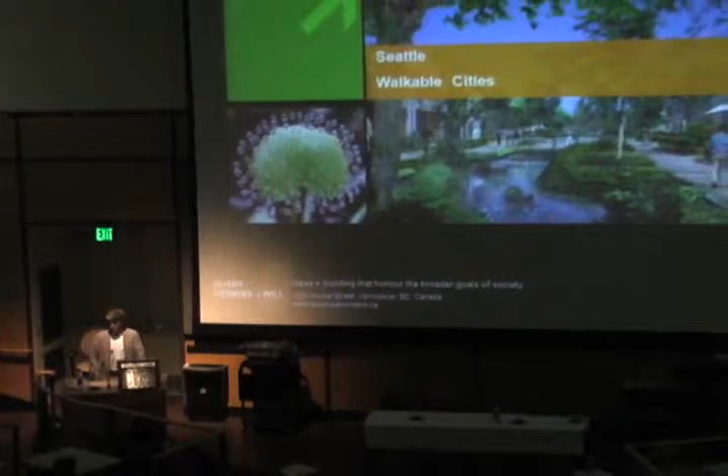I'm going to start a little bit of doom and gloom. There's a big problem out there called global warming, and a big part of it is automobiles. And so if we can reduce automobile use, then you've obviously got a lot more room for your vehicle, or for your bicycle lanes—not just bicycle paths—and also for pedestrians.

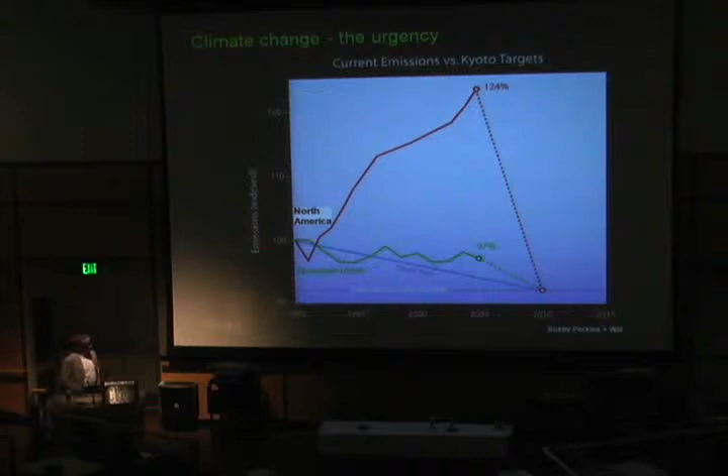So, where's that? This is the Kyoto Accord, signed in 1990. The United States didn't sign it, but most of the major countries in the world did. You can see that most of the European countries are trying to get to the goal by 2010, but Canada and the United States are going off the Richter scale, spending energy on all kinds of things.

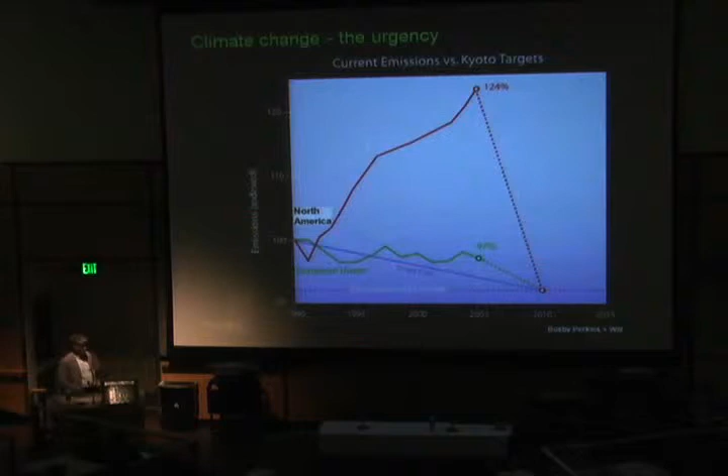And a big part of it is the way our cities are designed. They're all designed around cars and vehicles, and we need to change that thought.

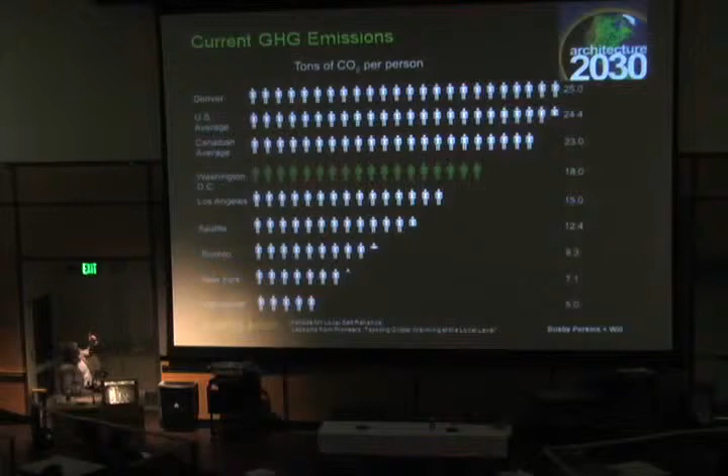So here's basically a range of various cities in North America, and what their carbon footprint is per person. You can see the U.S. average, and the second line up there is way up at 24.4 tons of CO2 per person. Canada isn't much different. Here, Seattle's much better at 12.4, and Vancouver—I don't know why we're so low—but we're down at 5.

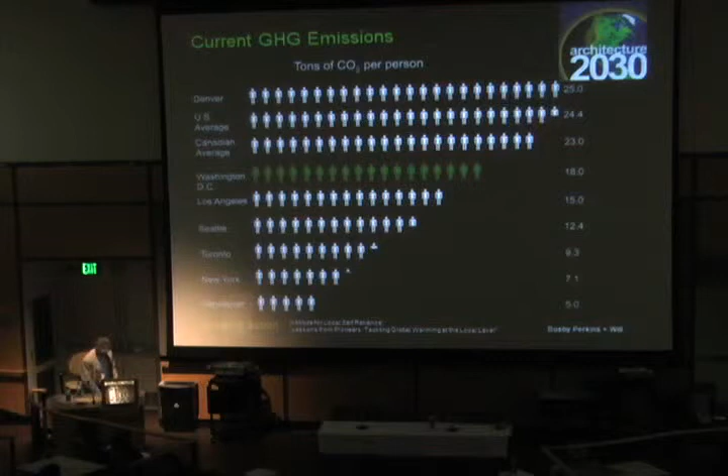But the goal really is what Oslo has, at a really nice 2.5. And that is what the experts feel is what every city should be aiming for, to make sure that we don't have a huge calamity on our hands, so that my 11-year-old daughter doesn't have to worry when she gets older. Well, you can see there are some major big cities there that have a fairly low CO2 footprint.

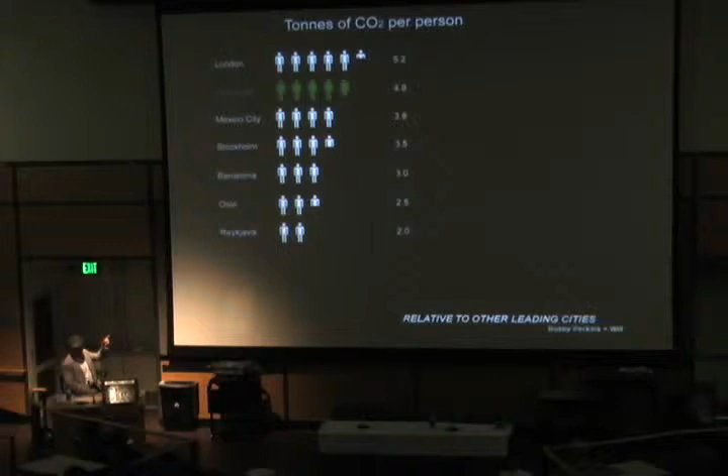You know, Mexico City is one of the biggest cities in the world. Obviously, it's a poor country, poor city. They have a lot more transit—there's a huge transit system there—and a lot fewer cars. So there's some reasoning behind these things.

But what I'm going to do now is present a quick scheme that we did to try to get Vancouver down to 2.5, in the next 20 years. And then I'm going to show this project in Dockside, which you will see follows on from the Vancouver study.

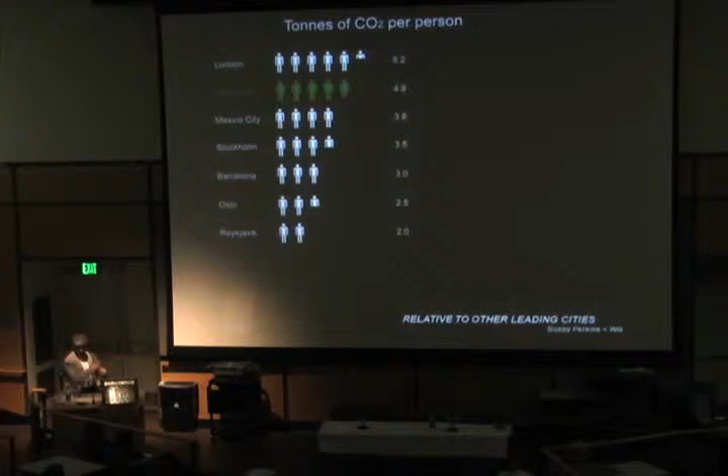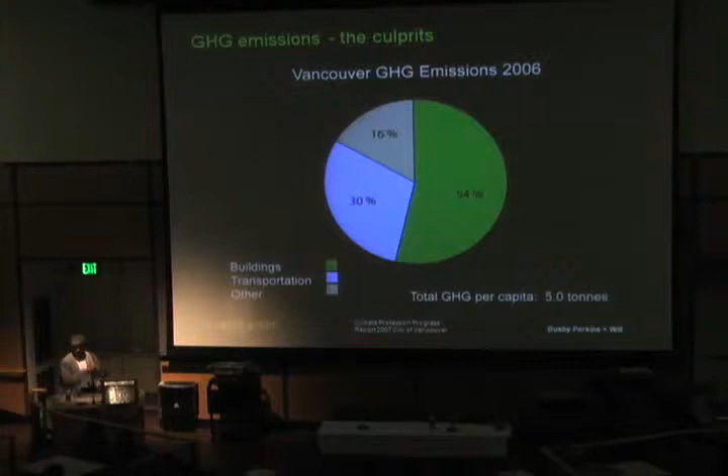The hybrid car isn't the solution. The solution is rapid transit, changing the city design so that you don't need to get in your car. And that means either walking and having communities where you can walk to work, walk to your library, walk to your fitness club, whatever, or take your bike. We need to change our zoning and urban design so that we don't need to get into cars. Make it so that cities aren't designed around cars.

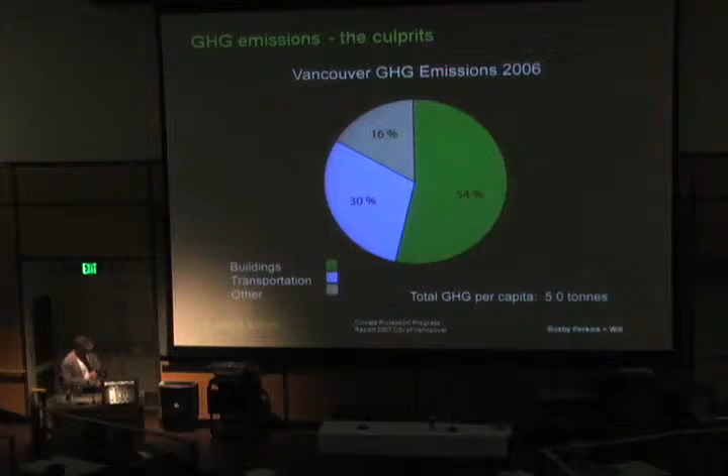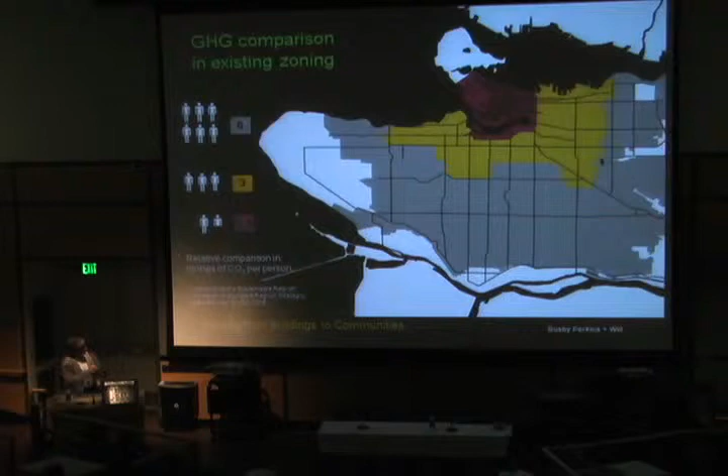The yellow is mid-rise density. So those people, like me—I'm in that yellow somewhere—I walk to work across the bridge downtown, but a lot of people are taking transit or could be biking. That's a half-hour walk, max.

All the people out in the gray area there, that's single-family housing. They're all getting in their cars and going somewhere because there's hardly any business in those areas. So they're either going further out the valley, or into the middle of the city, or across one way or the other. So all those people are using primarily their vehicles.

There's not a great transit system. There's a transit system right now that goes out towards the next community, Burnaby, over here. And there is a new rapid transit system coming out to the airport that'll be done next year.

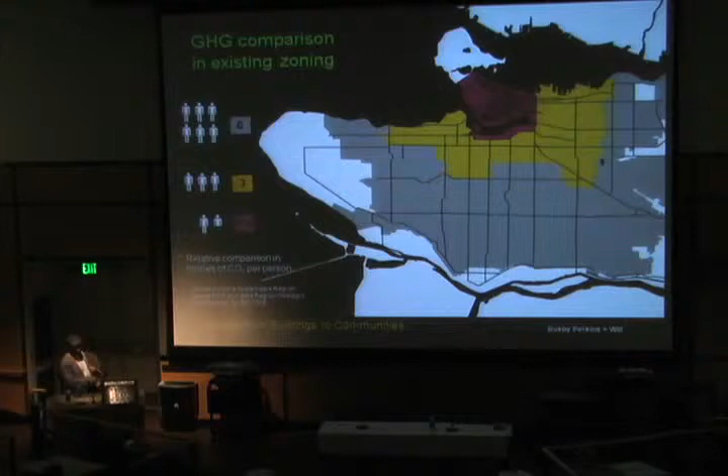There are a few high-speed bus lines, but the rest is just very minimal bus service. So anyone out here can't just hop on a bus and go over there. It's really difficult. So this needs to change.

So this really tells you the GHG footprint for each area. So how can we do it?

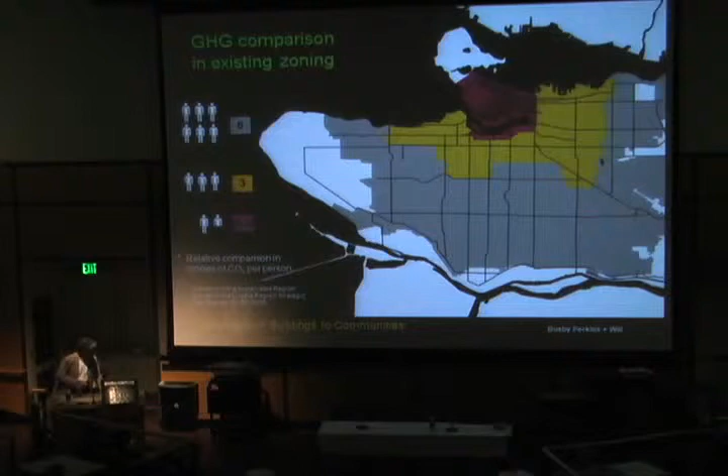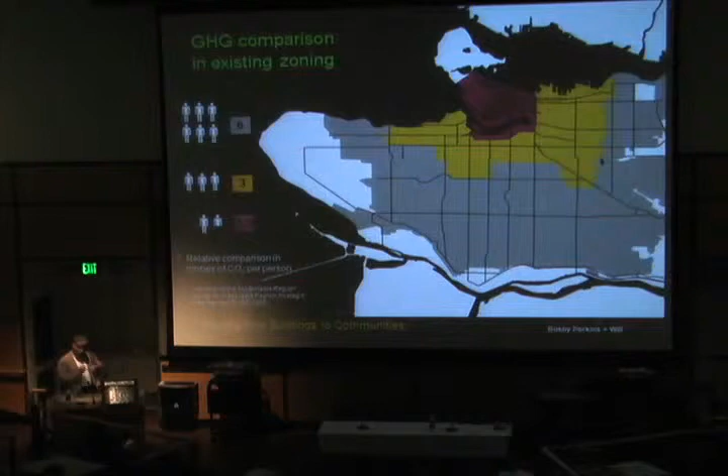There could be the cyclists, what I call the urban guerrilla cyclists. They can go about 5 or 6 miles, put on their funny shoes and do all this kind of stuff. But that's only 1 or 2%. We need to deal with this so that we get the other 60% or so out onto their bikes comfortably. This should be something that people feel really easy to do, not something that's a chore. The urban guerrilla bikers are committed. There's no way we're going to change them. They love it and they fight for it.

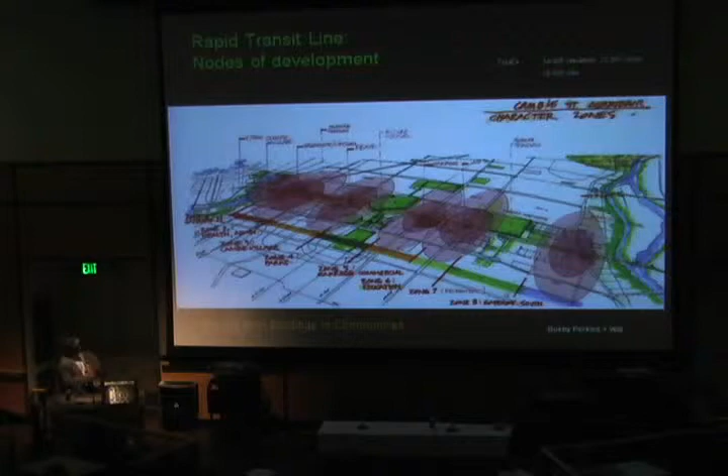So this is a diagram down one of the transit corridors. The idea would be that there'd be a grid of either rapid transit or high-speed buses that would have infrequent stops, and so you would create village nodes all the way along, rather than having this gray area. These would have higher densities.

They would have all of the amenities that any town should have. So instead of the center part of the city in the next 20 years just slowly moving out, the idea is creating a whole bunch of villages to augment that.

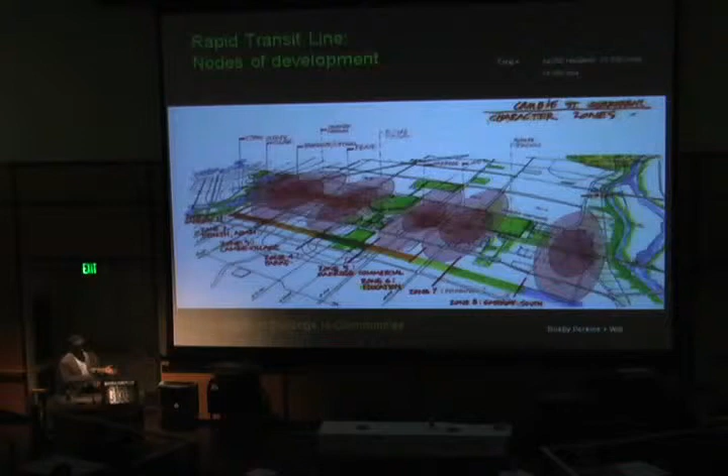In the next 20 years, by 2030, Vancouver's population is going to increase by 50%. That's a huge amount of people we have to deal with. We can't just deal with it by slowly moving the center out. We need to deal with it on a bigger level.

So by creating these villages, people can then work within the villages. You can get old, seniors will be there, there'll be fitness areas, shops, everything will be there so you can do what you need in that area. If you need to go somewhere else, then you get on rapid transit.

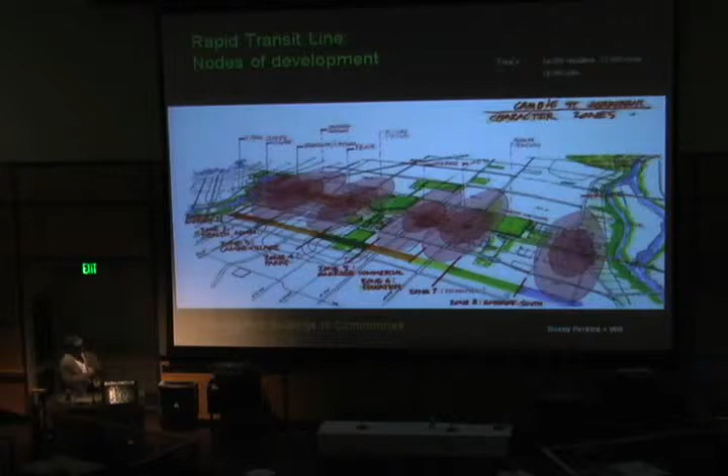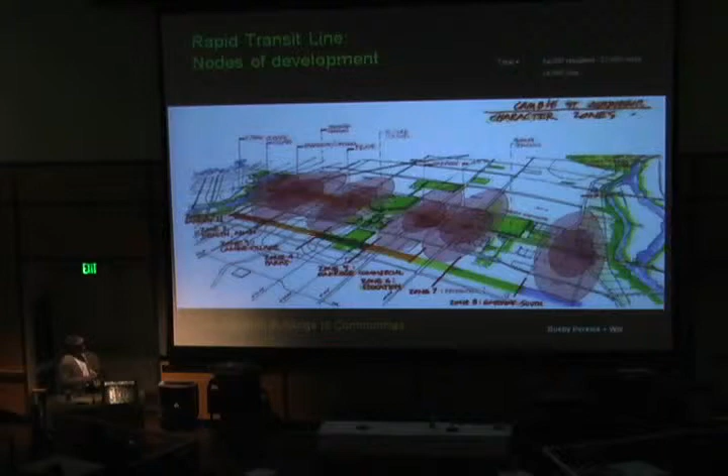Vancouver is hilly, just like Seattle, so biking long distances is good for some people, but it's just not going to work for everyone. So you need to be able to give them the ability to walk and bike locally, and then get somewhere else on a faster, easier mode of transport.

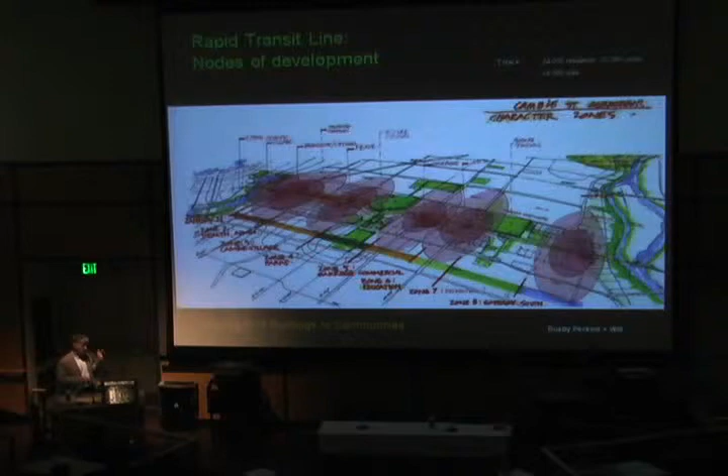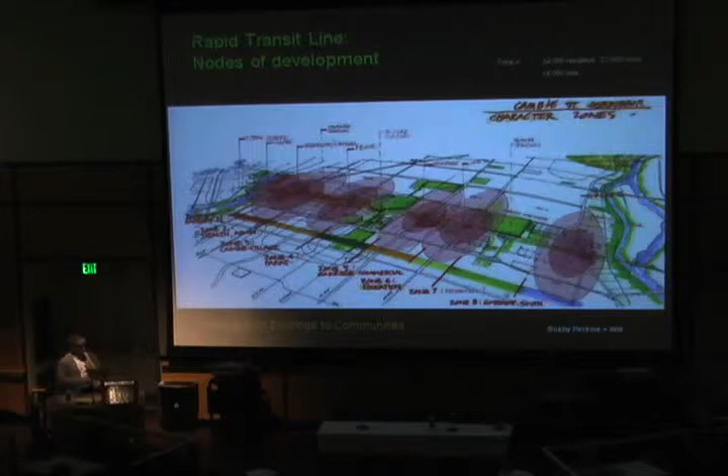There's a huge amount of money spent on infrastructure to keep our cars going. It's silly. If we took that infrastructure and put it into rapid transit, took out 2 lanes of every street and made it into rapid transit for buses, the amount of saved energy would be enormous.

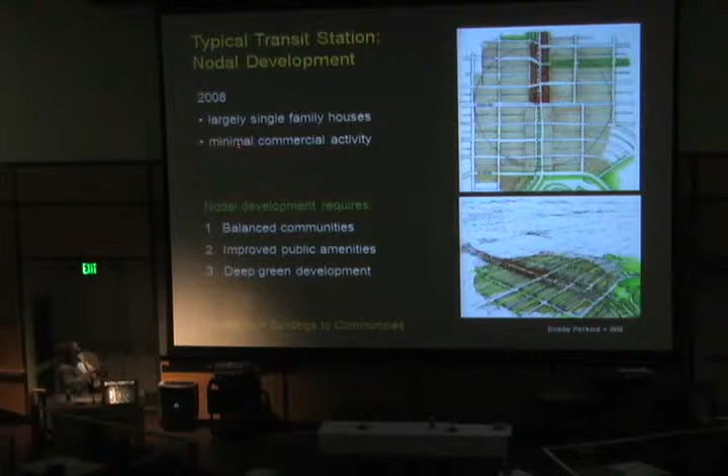So this is how one of those nodes exists currently. There's a bunch of 2-story commercial, probably with little residential on top, and then the rest is all single-family housing around it. So the idea is that it's largely single-family, with minimal commercial activity.

So the idea is to start going in this direction, where you would have buildings that could be 6, 8, 10 stories tall, that would gently flare down to get back to the single-family residential area, but it would become more of a village. Think of Hampstead Village in London, Greenwich Village in New York, those kind of spaces that are really great at the street level, yet still have really unique places to be once you're into the building.

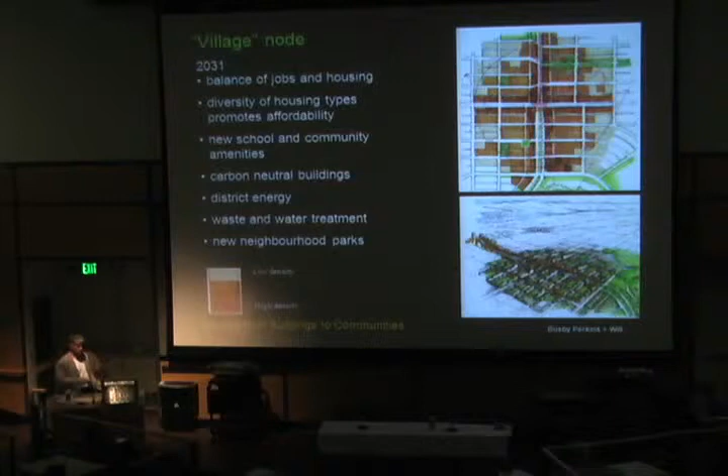And they have their shops, you don't have to go anywhere. They're very quiet spaces. And the one thing I like is the aging in place. You don't have to go off to some nursing home in a cheaper neighborhood. You stay where you are, where you're friendly, where your friends are, where you know things, where you're comfortable.

Now, Vancouver started at a fairly decent situation. There's some big cities all across North America. Calgary in Canada is one of the worst. It's just a small bunch of office towers in the middle and then piles of houses.

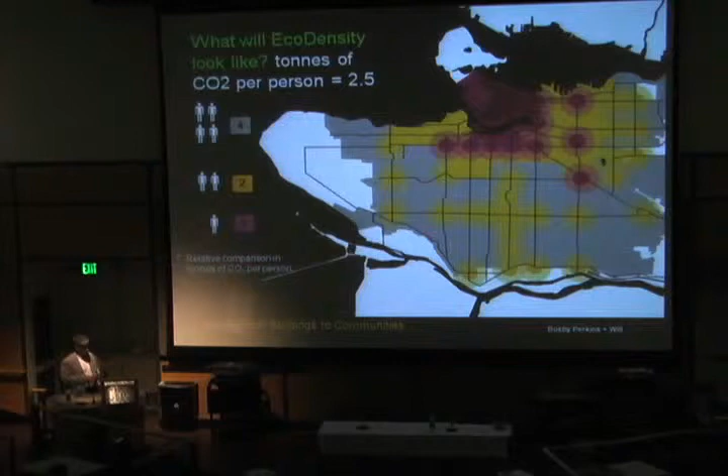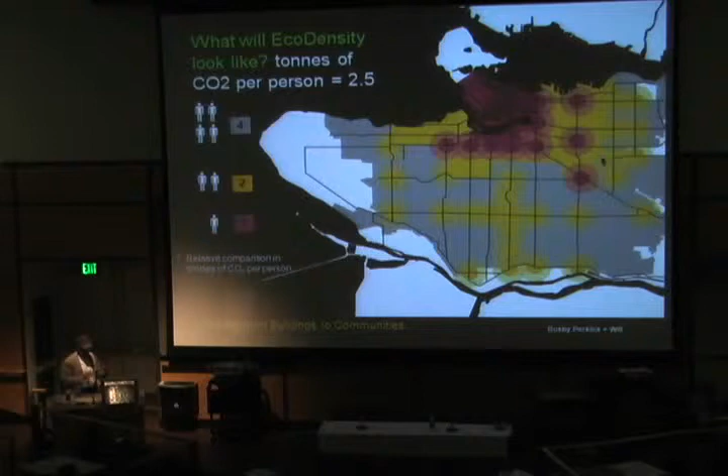They've got a huge issue because the land just seems to go on forever, there's no trees there. It's easy just to build another street. They've got to change the way they're doing things if we're going to have any reasonable way of dealing with global warming. It's a big issue. So let's get on to how we can work that out and make it work fine.

So this is a project in Victoria. I think you've hopefully been there, it's a very cute town. It's not all that big, I don't know what the population is, maybe 150,000 to 200,000 people, but it's the capital city of the province of BC, so there's a lot of important buildings in there, and a fair amount of money spent on infrastructure.

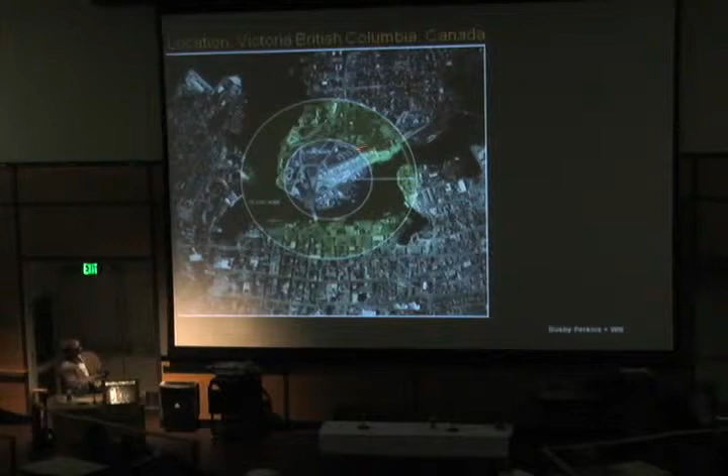This is the downtown, the site is this piece here. You can see we put a couple of rings around, there's a 5-minute walk and a 10-minute walk. So you can come across a bridge and get into the downtown area. This is the major downtown area, there's a big hotel here, the Parliament Building, and lots of shops in this area. So it's in a really neat location that way.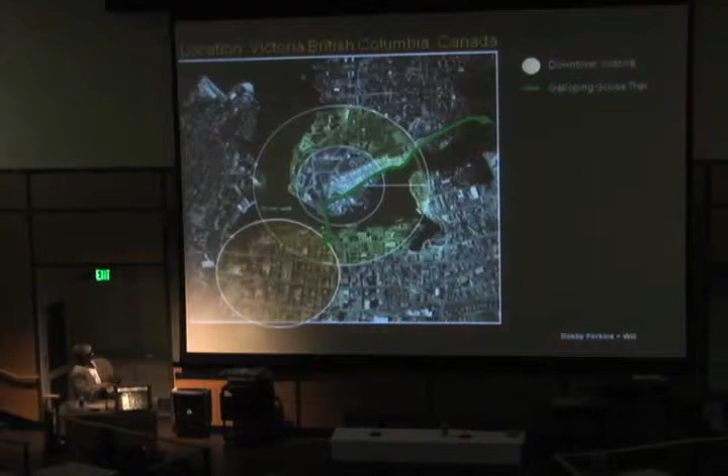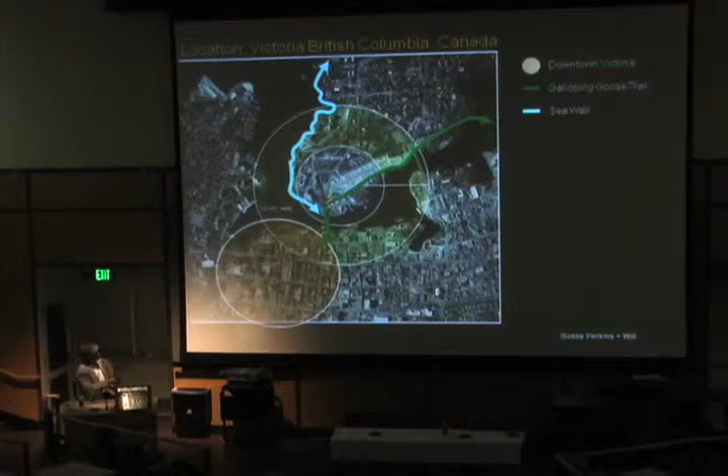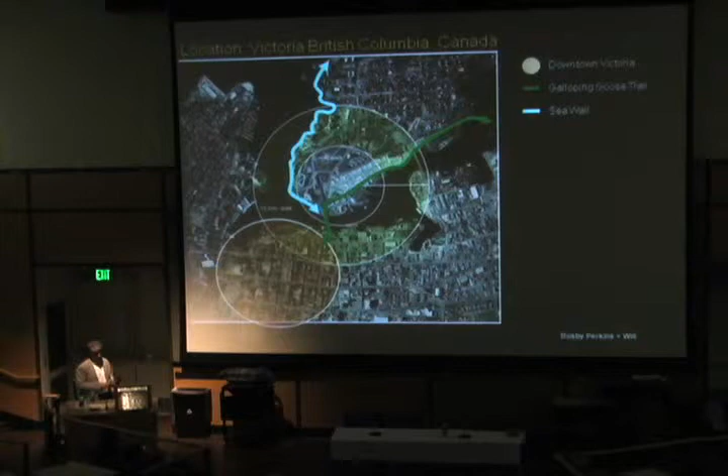Earlier someone mentioned the Galloping Goose Trail. I think it's named after a train route that used to go up Vancouver Island, and this follows the old train route. The train's not there anymore, but the flat trail is, so it connects right into the downtown through the site. There's also a series of seawalls that connect into that, so you could continue walking or cycling along there, and the same happens on this shoreline as well. So it's well served cyclist-wise on the site, and throughout Victoria it's quite well used by cyclists and walking paths.

This is a map showing where the Galloping Goose goes. Our site is this little area, right where that green part is. I think the green means, I can't quite read that, but the red is on paths, the green is on sides of roads, and the blue is on a boulevard or something like that. So it's a huge network, you can go a long, long way on this trail.

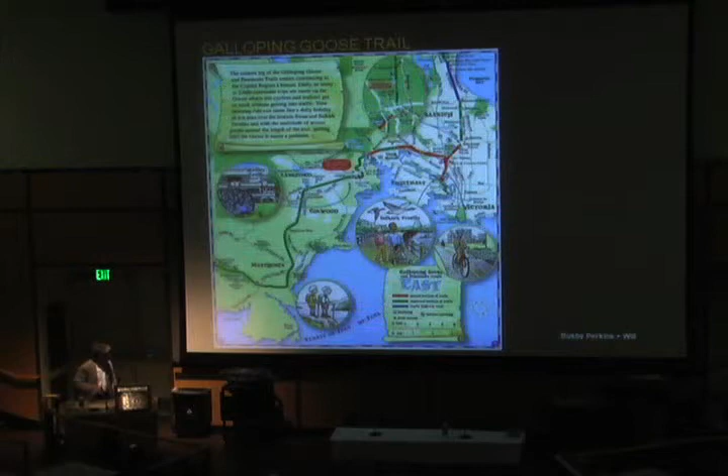This is the site, it goes up to about that area there. The City of Victoria owned it, and the city also owns all these dockyards here. They want the dockyards, which aren't part of the site, kept as a working dockyard for small to medium-sized craft they fix there. Eventually there will be a pier, a sort of retail pier that would come down here, so there'll be a connection to the water. The water line used to cut in about here, this is all fill, dirt, contaminated fill. There's quite a drop from up here down to this road, about a 50-foot drop, so there's a really nice slope across the site. Overall it's about 11 acres.

The city owned the whole property, so they were able to put some fairly strong guidelines on the development. There was a competition for development teams to get the site, and we were the architectural part of that team. There was a whole series of mechanical, electrical, geotechnical consultants, plus a developer and a financial team to come up with the bid. We were selected, I think in 2004, and it's gone ahead quite quickly.

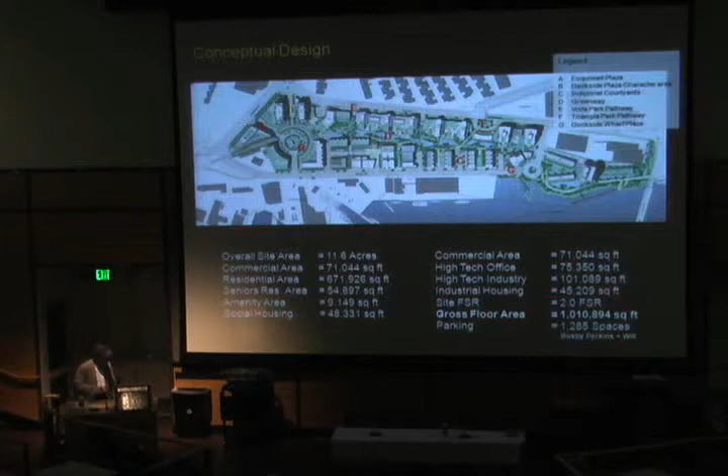So here's the site. There's primarily residential towers of about 8 to 14 stories, intermixed with some townhouses along the upper road here, called Tyee Road. This lower portion is 3 to 4 stories and would be mixed use, light industry or commercial at grade with housing above it. So it's an interesting sort of mix of uses there.

And then this is more of a commercial node with a hotel, office, and commercial space around a big courtyard. Some residential here, and a seniors building there. The seniors building is purposely placed so they'd be looking over where the active areas are, giving them some interest, and it's not very far for them to go to the commercial area. There's also a little odd bit of property up at this end of the site where a taller building would be. The idea is that there's a bridge here and another bridge at this end of the site.

So there's tall buildings at the two ends of the site to sort of anchor the project like bookends. They're in the range of about 14 stories. Victoria doesn't have very many tall buildings.

So phase 1 has been completed now, and it's been awarded this LEED Platinum score. LEED stands for Leadership in Energy and Environmental Design, something like that. It's a checklist, a way of measuring and comparing buildings in sustainable terms. There's LEED certified, silver, gold, and platinum. Platinum is the highest, so it's done really well.

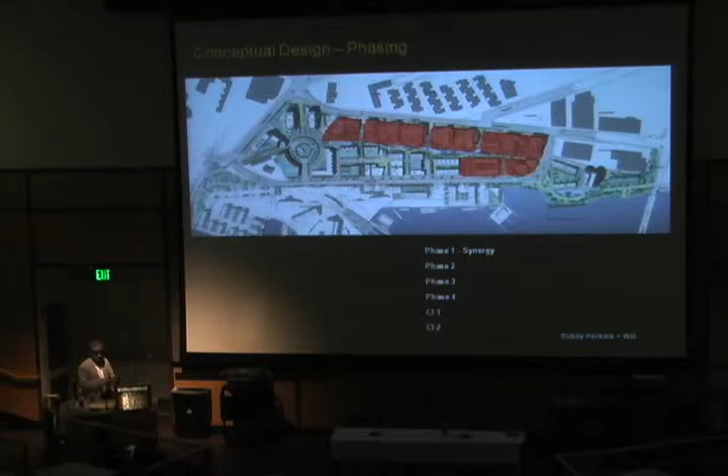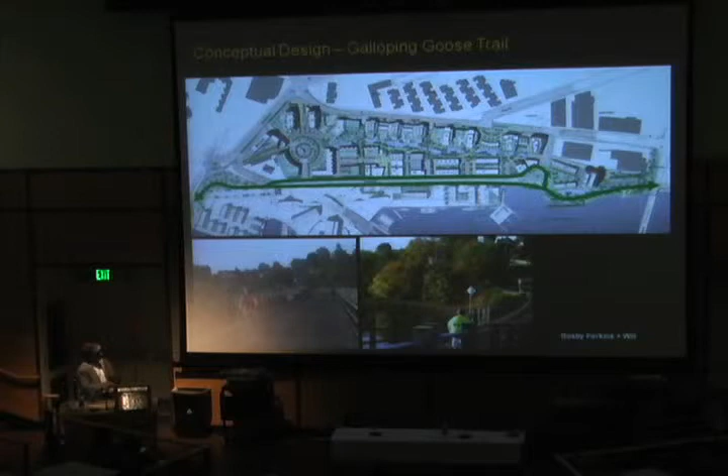So the Galloping Goose Trail—this is Harbor Road. There's an existing bicycle path that connects into a bicycle trail, so we had to work quite closely with the local bicycling association on how the street would work. This won't be a very highly trafficked road, but with the light industries there will be some trucks and things like that.

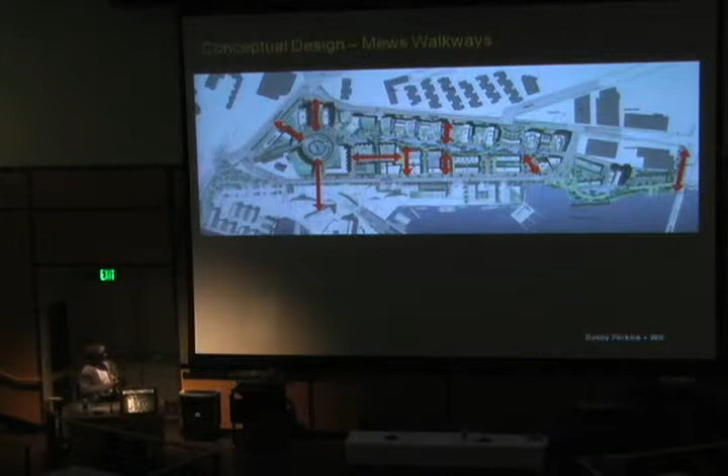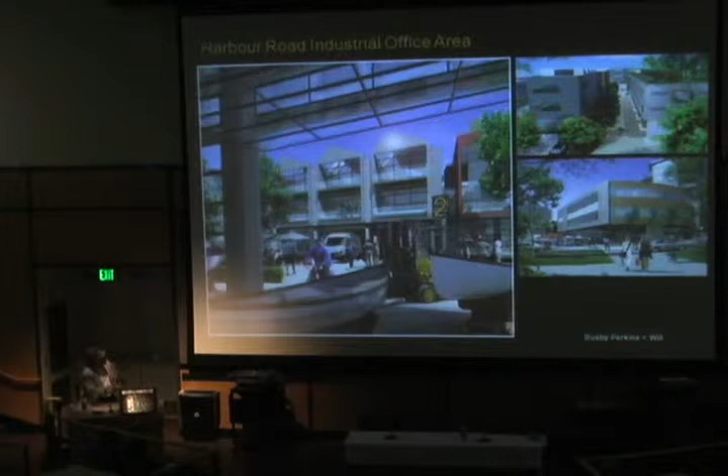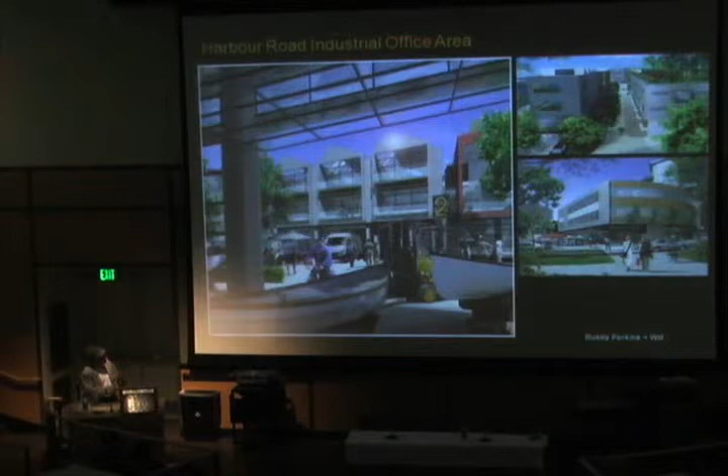So we had to work out the crossings quite well with them. Then there are some minor mews that are even more controlled and smaller scale throughout the site. Here you can see one here—a little commercial building and townhouses with a mews where the residential parking would be, and some vegetation to buffer it. This is the little building that's going to have the pub on the ground floor, under construction now.

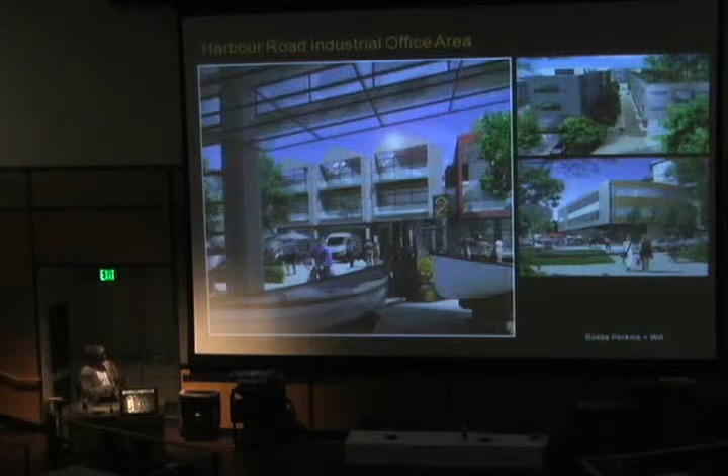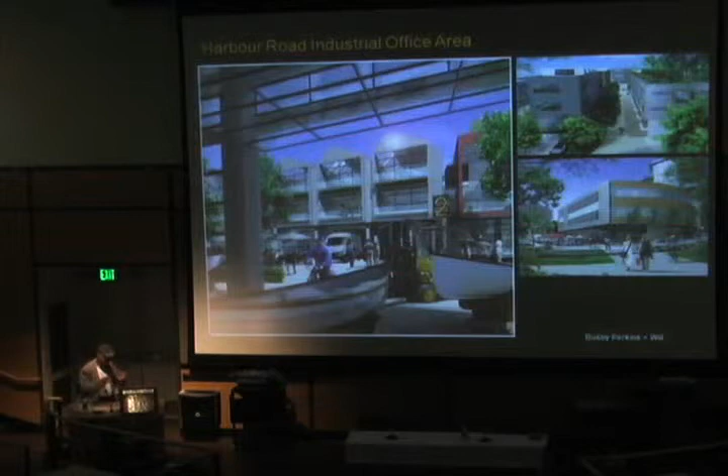But that view goes right up to Tyee Road. And this is the feel of some of those areas where there's light industry and live-work spaces above—the idea is it's fairly dense, so a number of uses can happen in the spaces.

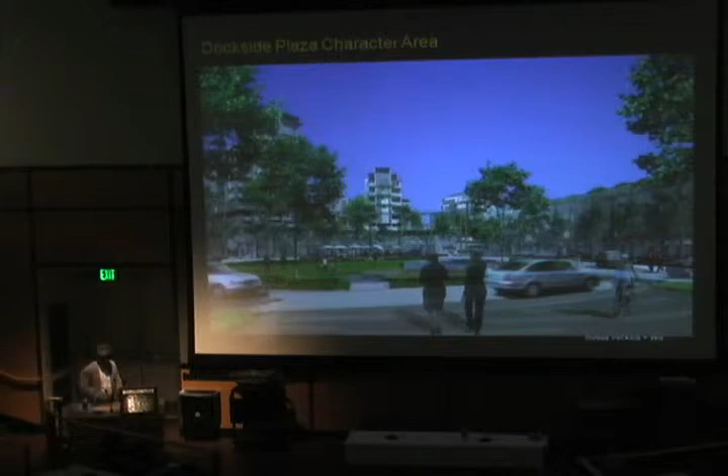This is the commercial roundabout area that has a presentation space in the middle, probably an amphitheater type space.

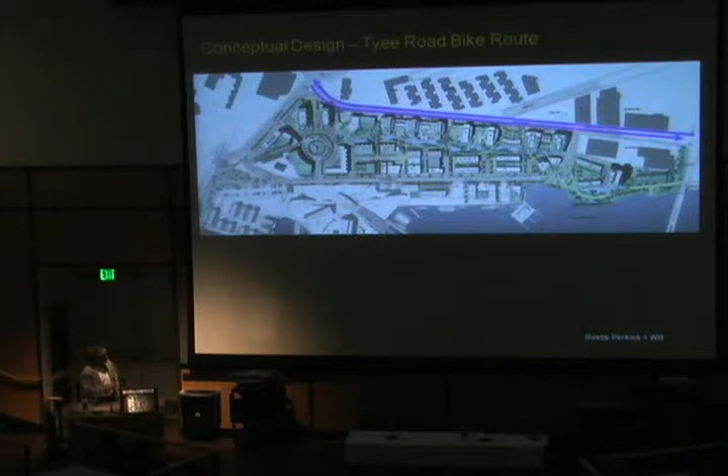And finally, on Tyee Road—this is before this project started, it was a real rough road with 2 lanes in each direction. It's been pulled down to just 1 lane in each direction, and it'll have a bike lane similar to Harbour Road, the lower one, plus a bike lane and parking on each side.

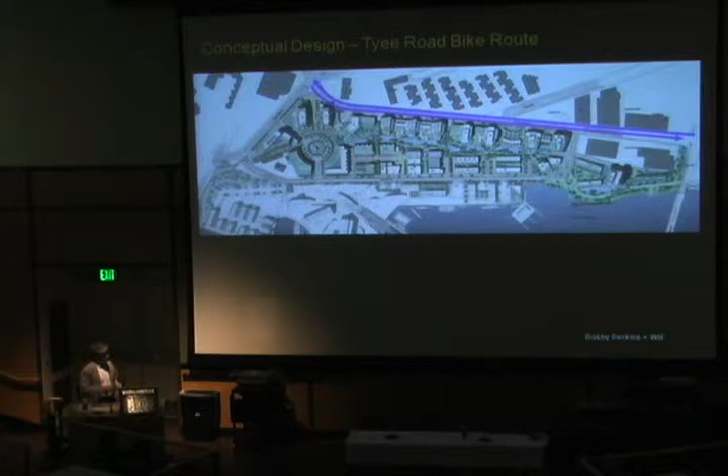Here's an original illustration of that—this would be the bike lane, 2 lanes here, this would be the parking, another parking on the other side. And this is what has been built.

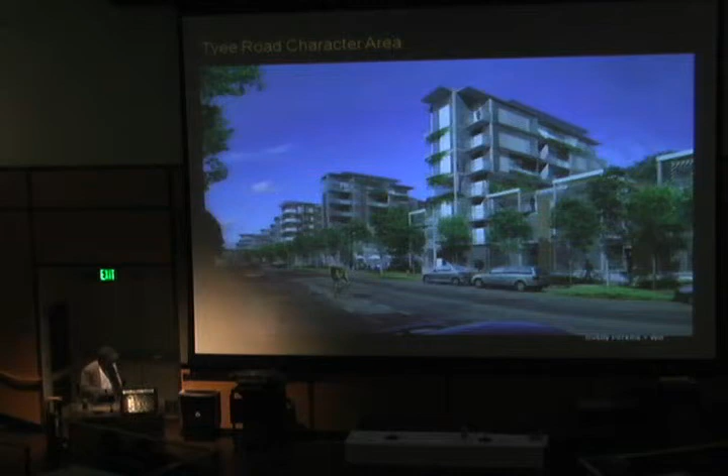This is phase 1 from here, that building, some townhouses in this building. Here you can see there's 1 lane this way, 1 lane that way, bike lane and parking, and the same thing happens on the other side. So it's really a very tight, compact street—it's slowed the traffic down an awful lot there.

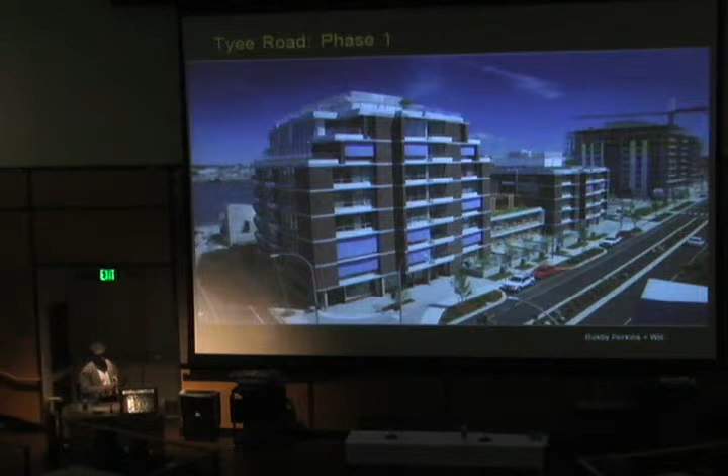This is the little commercial building I was saying that was being built, and that's phase 2 down there. This was taken in the summer, so it's already topped off. Some of the things I'll point out: these big blue blinds are exterior blinds that don't usually get built in North America—they're usually on the interior side—but they help dramatically with the solar heat gain from the west side of the project.

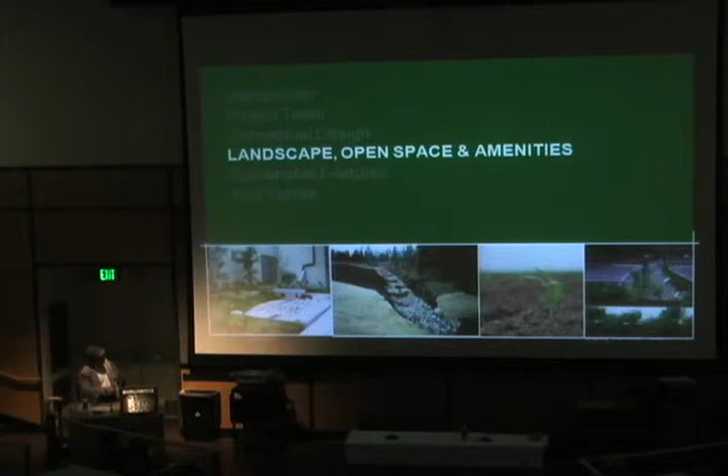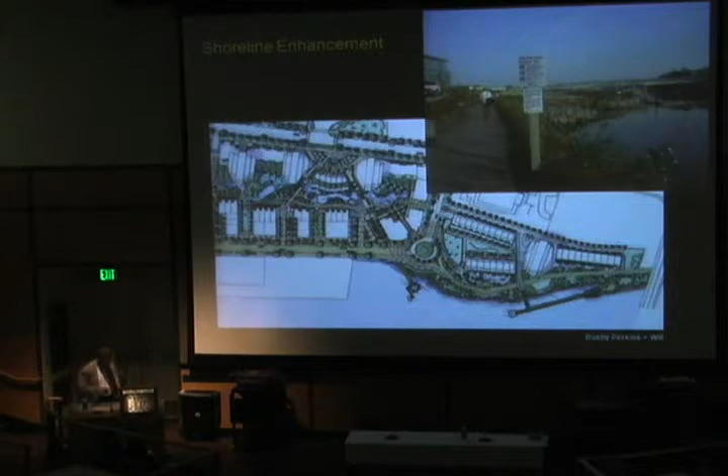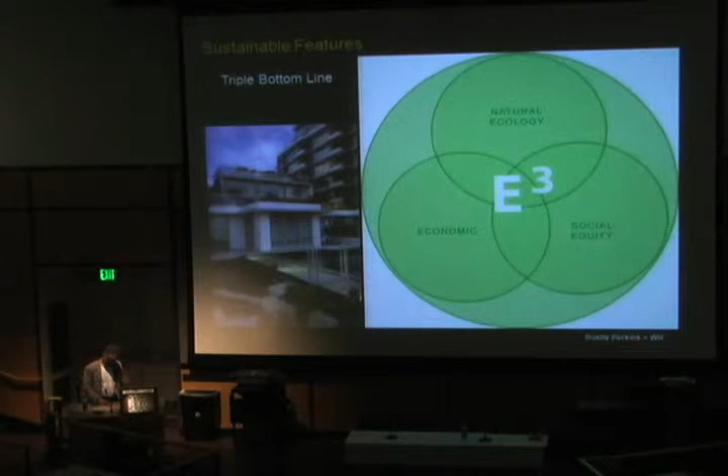So some of the sustainable features—the main thing is that the client, the developer, was really adamant about this idea of the triple bottom line. Most developments, really, cost is the main issue—he wants to make a certain profit. But this developer has a different view of things, and he feels that economics has to go with the natural ecology of the site plus the social aspect of the site.

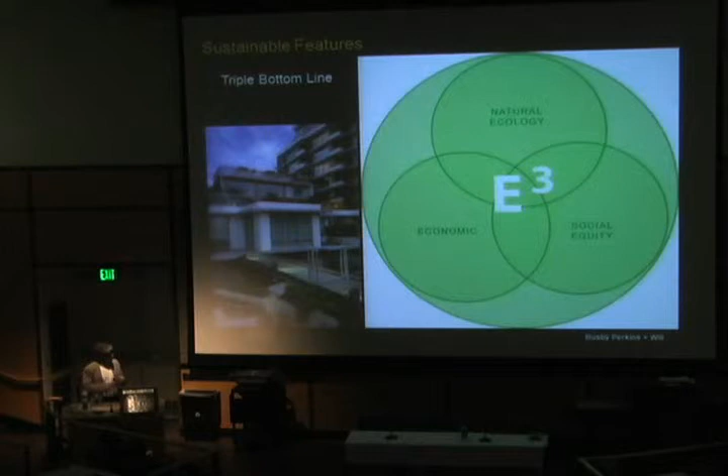So he's adamant that there's a certain amount of social housing in every phase—there was 5% in the first phase—and that there's enough mixed use on the site to create a node that people will want to stay in. But then there's also an ecological element to everything, and I'll show you a few of the things as we go.

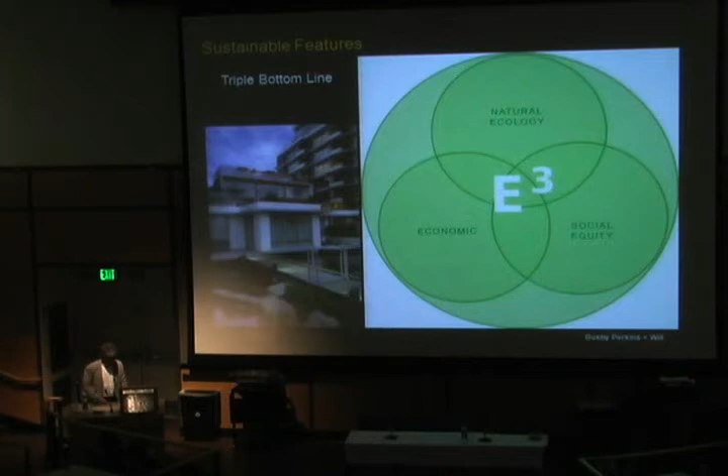One thing that we found through projects that are about 100,000 or about 1 million square feet or larger is there's certain synergies to make things more economical. So we were able to provide district heat—that means on site we're creating the heat for all the needs, and I'll show you that in a sec.

And renewable energy through cogeneration plant. There's also a waste treatment plant on site. If you don't know, Victoria doesn't treat its waste—it sort of pushes it out into the sound down towards Seattle. So you'll be glad to know, though, that they're trying to sort that out, but that's going to be years and worth billions of dollars to fix.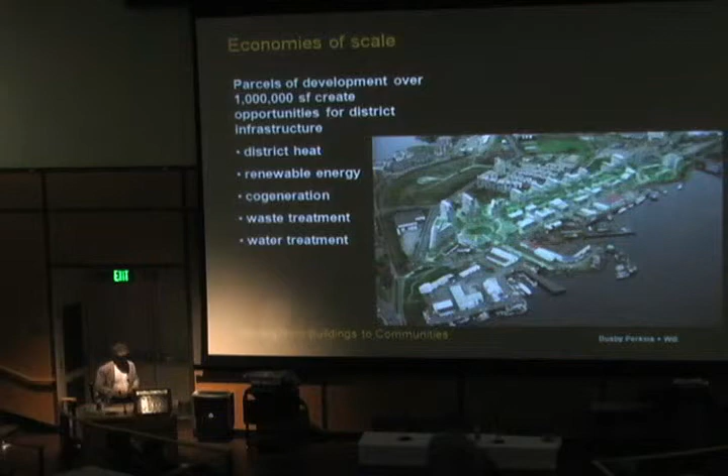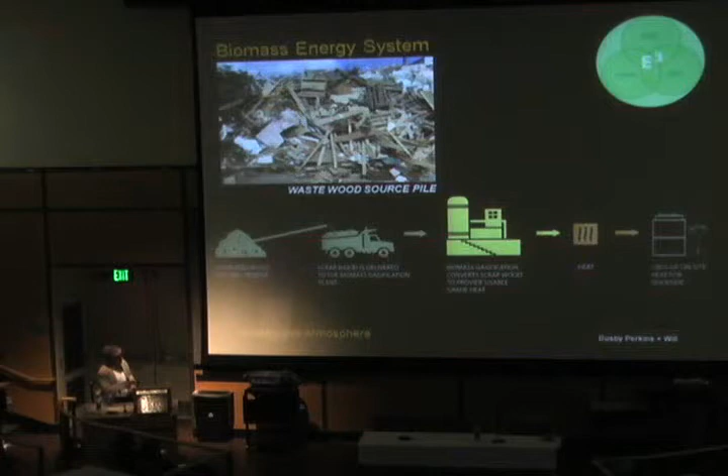And also water treatment on site, as I've already talked about. So this is the biomass energy system to create heat for all of the buildings on site. We looked at a number of different ways of creating energy, and this, because there's a lot of waste wood source in Victoria through some of the industries, there was a deal struck with some of them to be able to take that wood waste. They're building a biomass plant, which is due to be finished fairly soon and fired up, so that they'll bring in truckloads of this stuff and put it in the machine, and then it creates energy, primarily heat.

And you can use that heat to do a number of things.

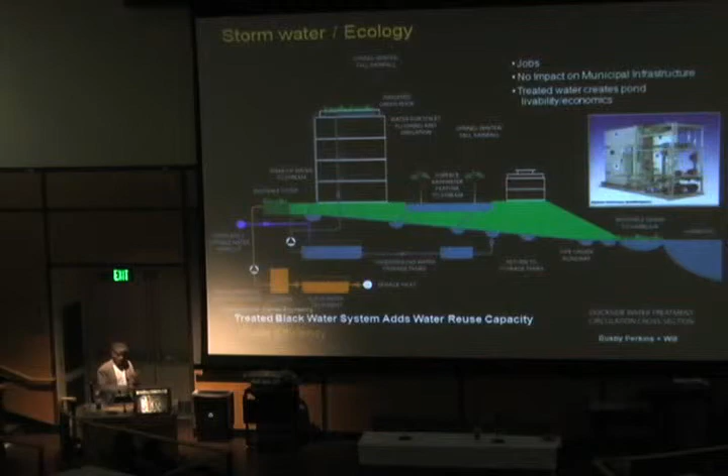Then there's a complex water treatment system on site. This machine up there is the sewage treatment plant—it's a very small building, probably only the size of this little podium here, and that's dealing with all the sewage through the whole site. There's also collecting water from rooftops throughout the site, cleaning it, and then using it for irrigation. This is that slide showing that.

Because it was a brownfield, capping and dealing with the remediation of the hazardous material was important. Providing proper cycling and City Car sharing was important.

There's a number of green issues. Native plants for landscape is right across the site. And then the stormwater management.

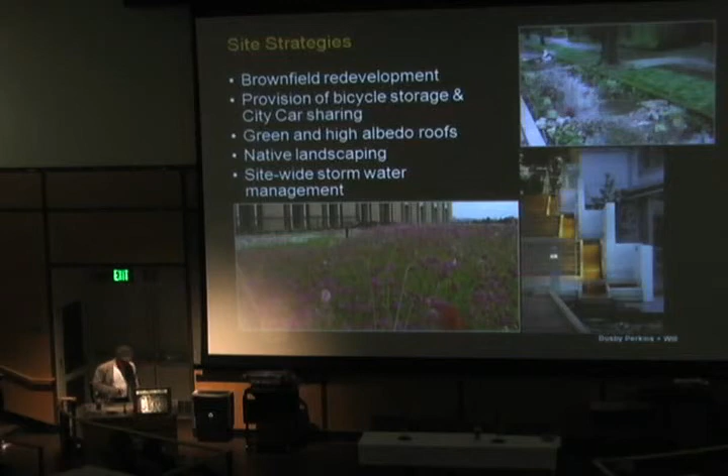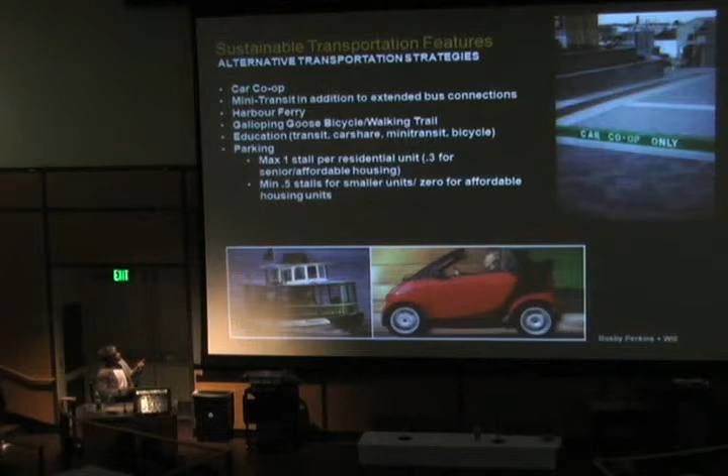This is something just on—okay, I've only got about four slides left. So on transportation, there's co-op cars in every building or a group of buildings, and there's even defined spaces for them.

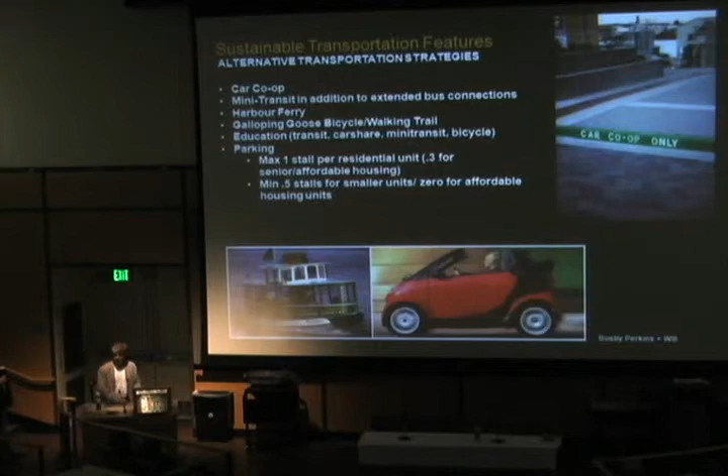Then there's also, when the project continues on and gets built out further, there's going to be a mini transit system that will connect it to the downtown. There's a little harbor ferry that exists that will come to that dock once the project has got more density on it. There's the bicycle walkway trail. And then parking—we've tried to reduce the parking to the minimum that the developer and city could deal with.

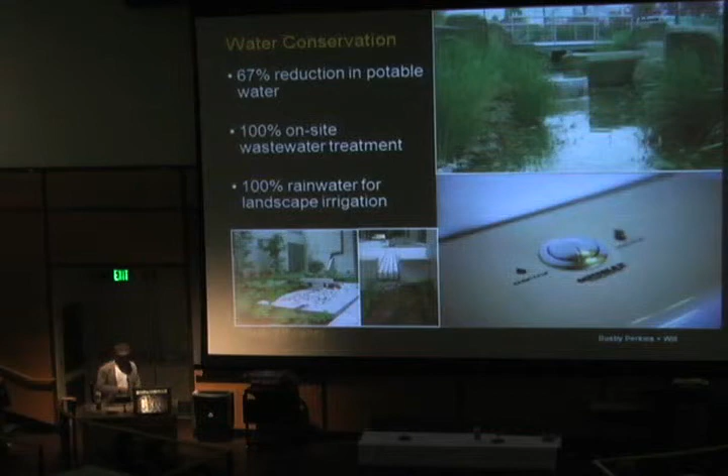So this is the major one: we've been able to reduce the percentage of potable water used by 67% compared to a typical project, and 100% on-site wastewater treatment, and 100% use of rainwater for landscaping.

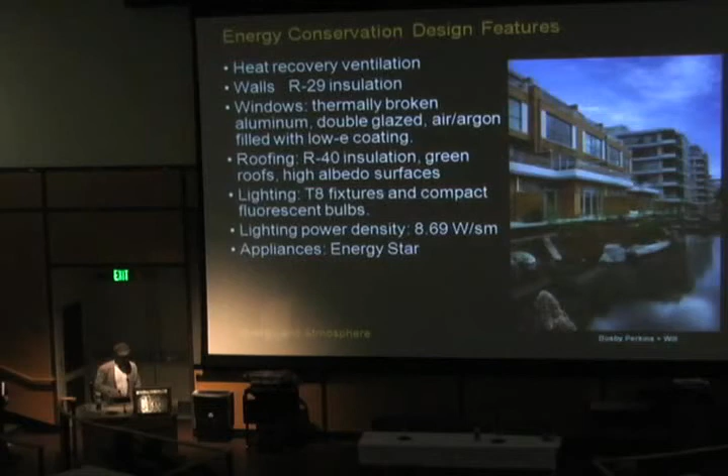And there's a series of technical building things that we did to make the buildings more energy efficient and use less harmful materials to the environment, such as bamboo, low-emitting paints, high fly ash concrete, and using local materials.

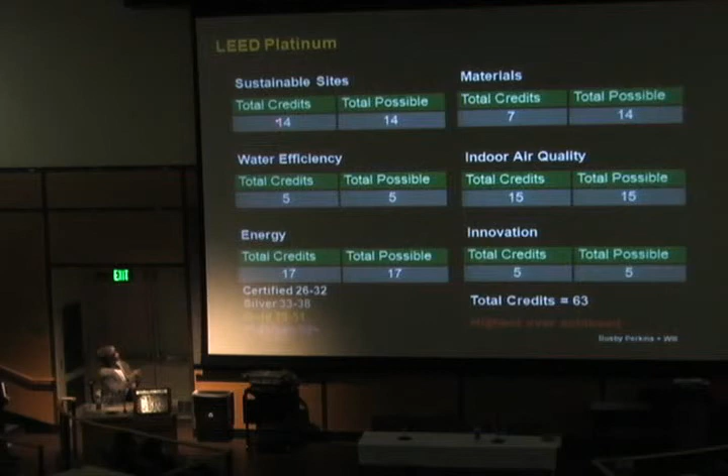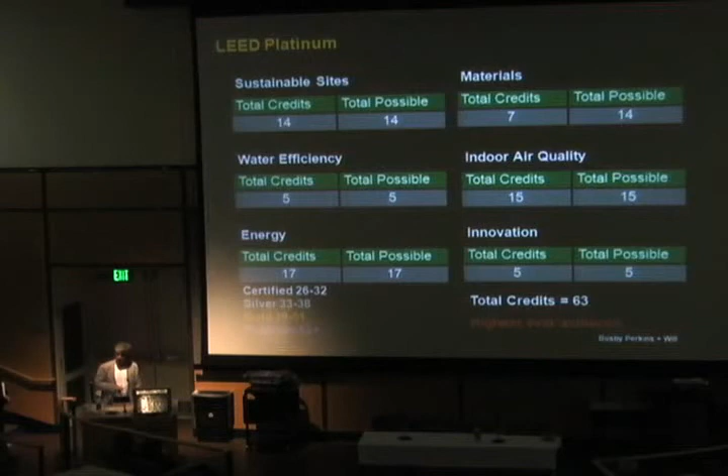So the achievement is LEED Platinum. You can see this is a comparison of the scores—our scores versus what's possible. We got full scores on everything other than just on materials, and that's because some of the materials like aluminum, vinyl, things like that, you just can't get locally. They had to be imported quite a bit.

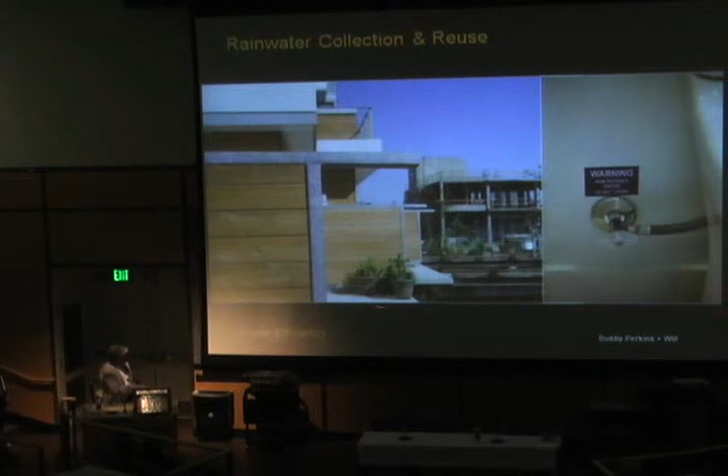Green roofs, rainwater collection—we had fun with things. We used these rainwater spouts, so when it rains, they fall over the balcony rails into the pond, so you see it.

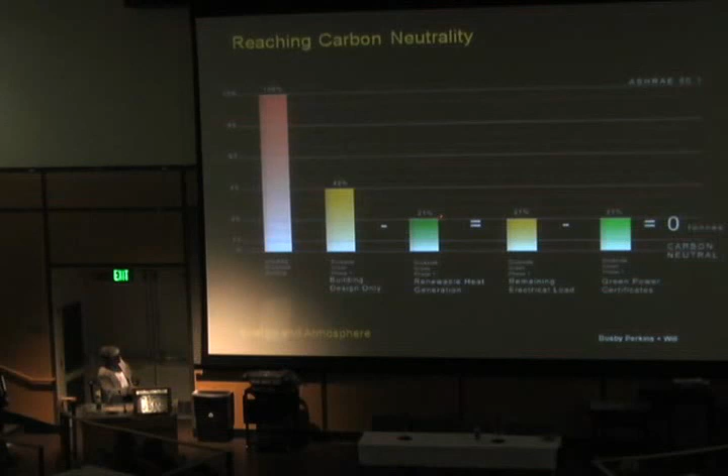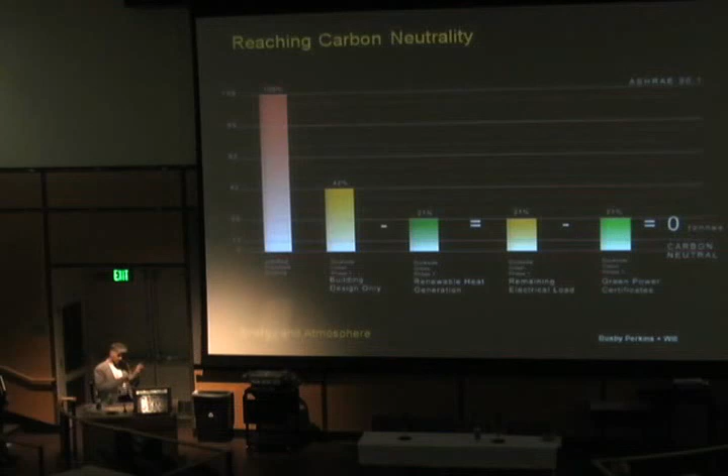So we're 21% short. What we do is we buy green power certificates, so that offsets all of the carbon used on the site. That's how we're getting to carbon neutral on this project. And that's it.